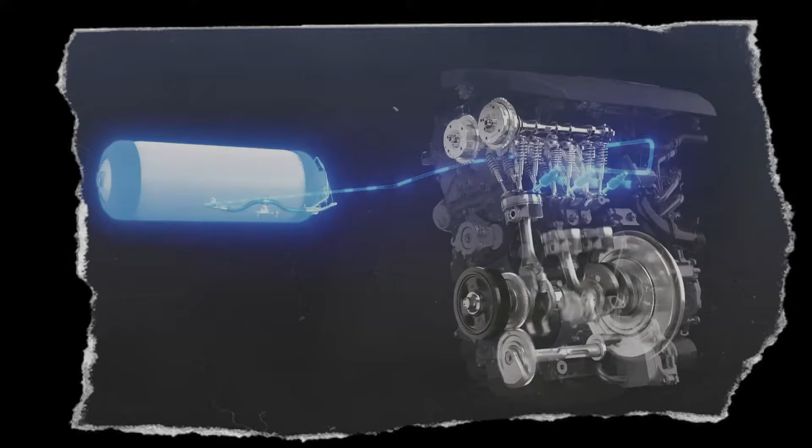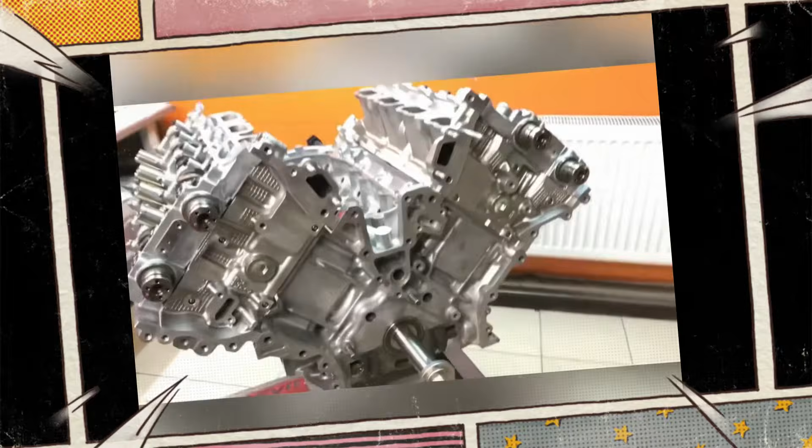Toyota has a reputation for producing robust, reliable engines, and the 1UR-FE is no exception. This 4.6-liter naturally aspirated V8, part of Toyota's UR engine family, succeeded the legendary 2UZ-FE, featuring advanced technologies and construction methods aimed at improved efficiency, performance, and reliability.

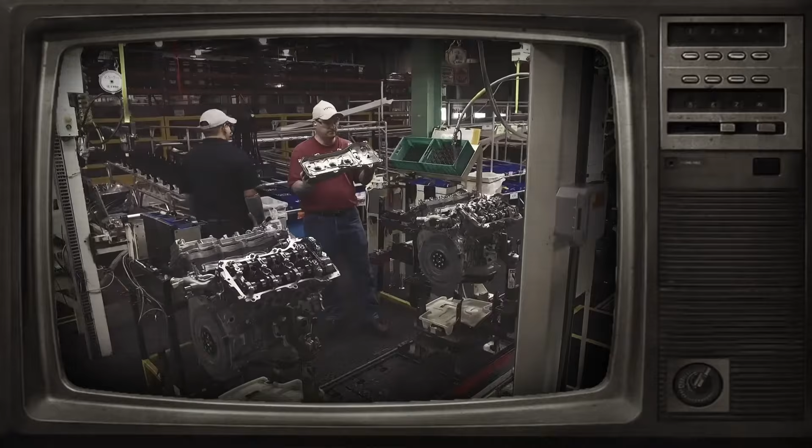Initially introduced in Lexus vehicles, the 1UR-FE later powered various Toyota models such as the Land Cruiser 200, Sequoia, and Tundra. In this video, we'll dive deep into the engine's design, explore its specifications, highlight known problems, and provide insights into its real-world reliability.

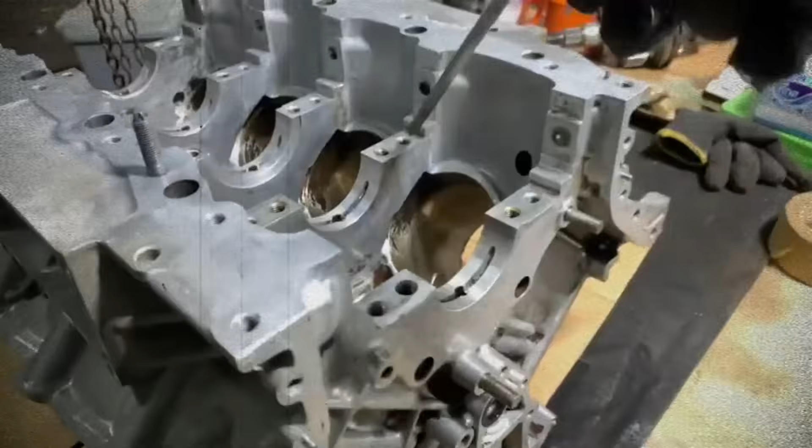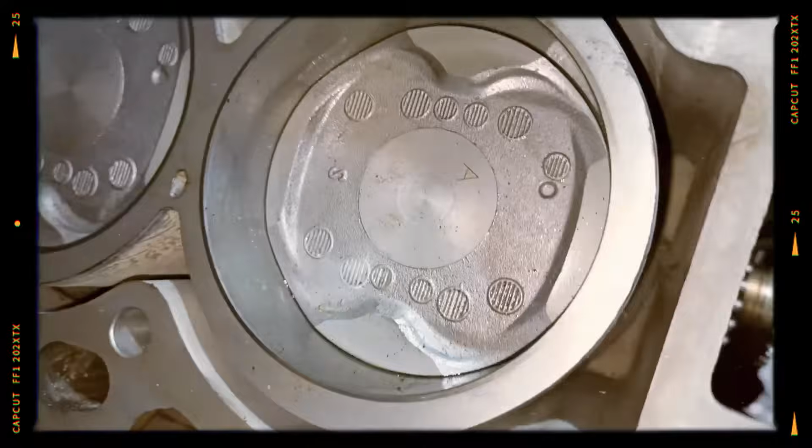The 1UR-FE is built around an aluminum alloy V-shaped block with a 90-degree angle between cylinder banks. Unlike its iron block predecessor, the new aluminum block incorporates durable spiny-type cast iron cylinder liners for better heat dissipation. Its bore measures 94 mm with a shorter stroke of 83 mm, resulting in a displacement of 281.2 cubic inches.

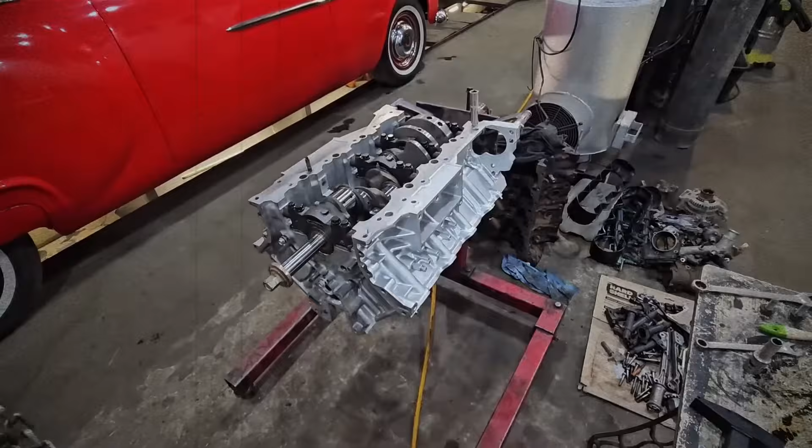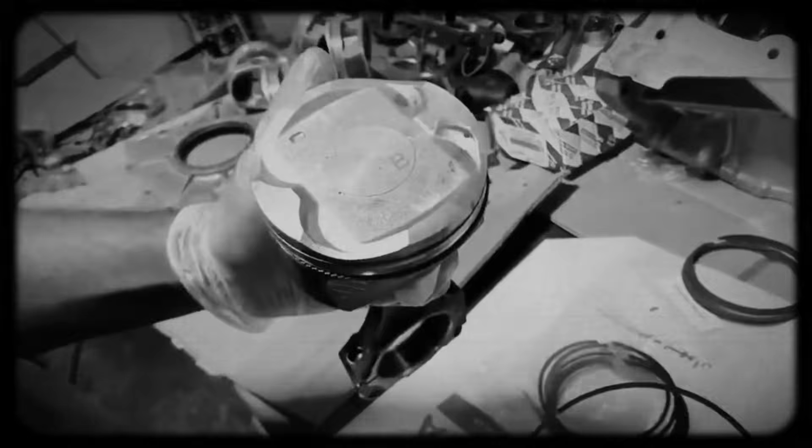The forged steel crankshaft features 6 counterweights, fewer than the 2UZ-FE, which slightly reduces operational smoothness but saves weight. A torsional rubber damper on the crank pulley compensates effectively for vibrations. Forged connecting rods and aluminum pistons with resin coatings, combined with piston cooling oil jets, ensure durability and efficiency.

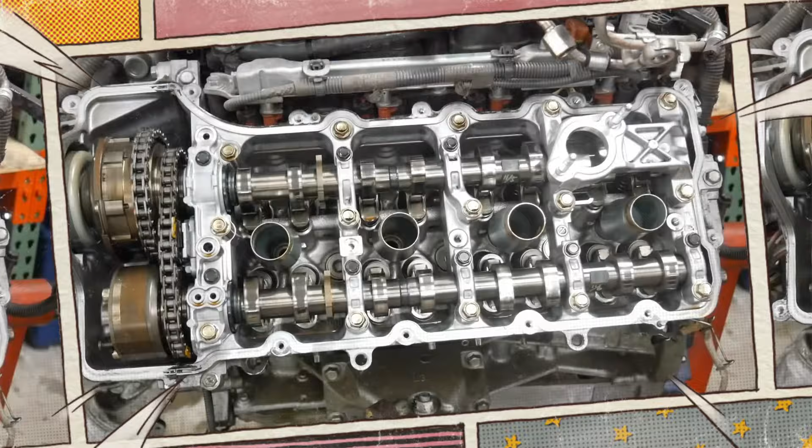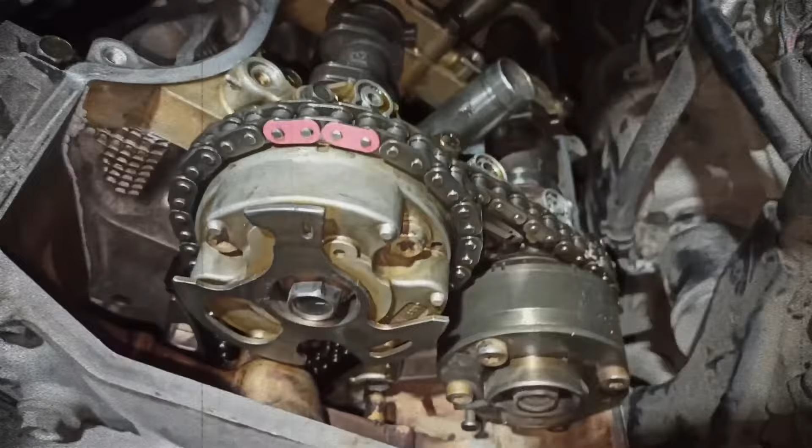A completely revised cylinder head design accompanies the new aluminum engine block. Each bank utilizes dual overhead camshafts, DOHC, operating 4 valves per cylinder, 32 valves total. A significant improvement is the adoption of chain-driven timing instead of belts, enhancing reliability and reducing maintenance costs. Primary timing chains drive the intake camshafts, while secondary chains connect intake and exhaust camshafts.

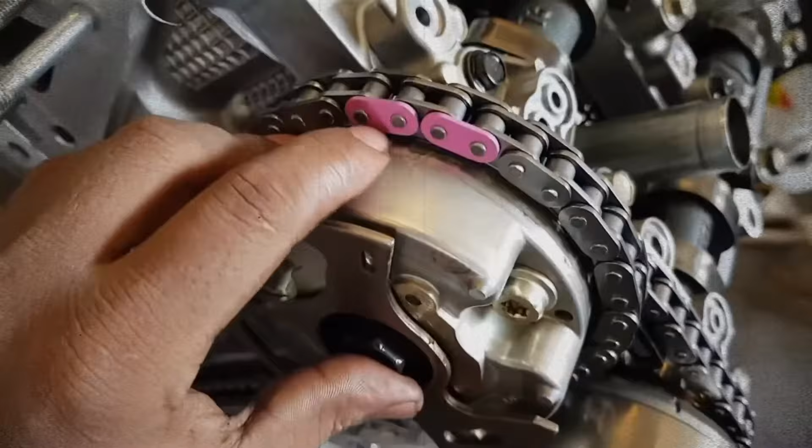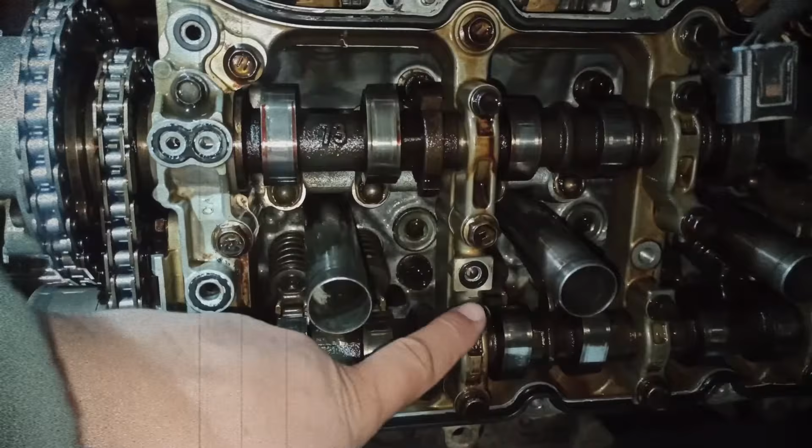Hydraulic lifters are now standard, eliminating the need for manual valve clearance adjustments. Additionally, Toyota incorporated its Dual VVT-i system, controlling both intake and exhaust valve timing, and installed magnesium alloy valve covers to reduce overall engine weight.

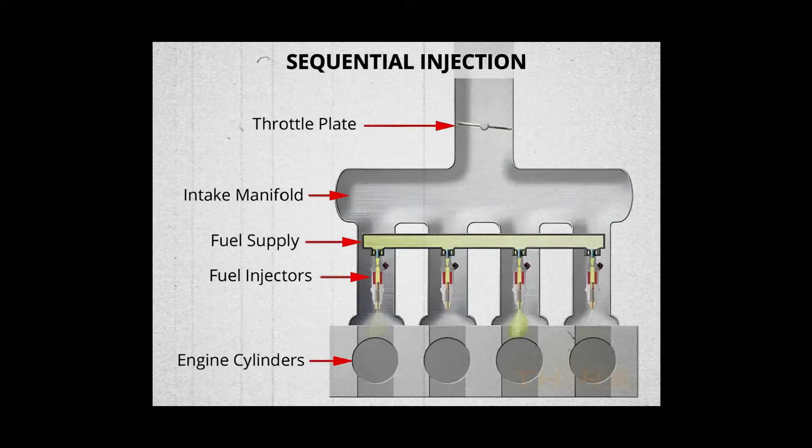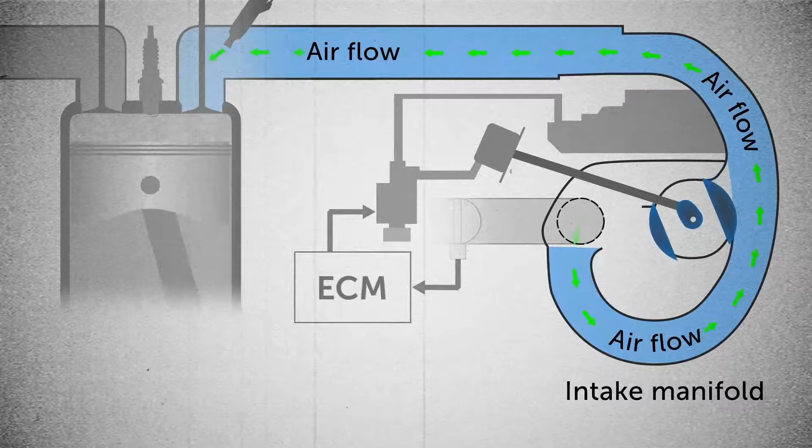Fuel delivery utilizes sequential fuel injection, SFI, characterized by 12-hole injectors for precise fuel atomization and efficient combustion. The intake system includes Toyota's acoustic control induction system, ACIS, optimizing airflow and torque across various RPM ranges. An electronically controlled throttle body, ETCS-i, further enhances throttle response and engine efficiency.

The 1UR-FE's exhaust system features stainless steel headers and piping, with dedicated catalytic converters for each cylinder bank. To achieve strict emissions compliance, Toyota equipped this engine with a water-cooled exhaust gas recirculation, EGR system, and a secondary air injection, SAI system, which rapidly warms catalytic converters during cold starts, significantly reducing harmful emissions.

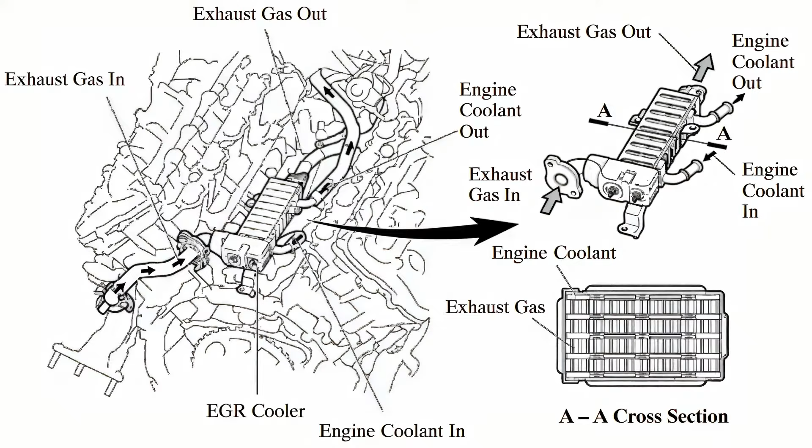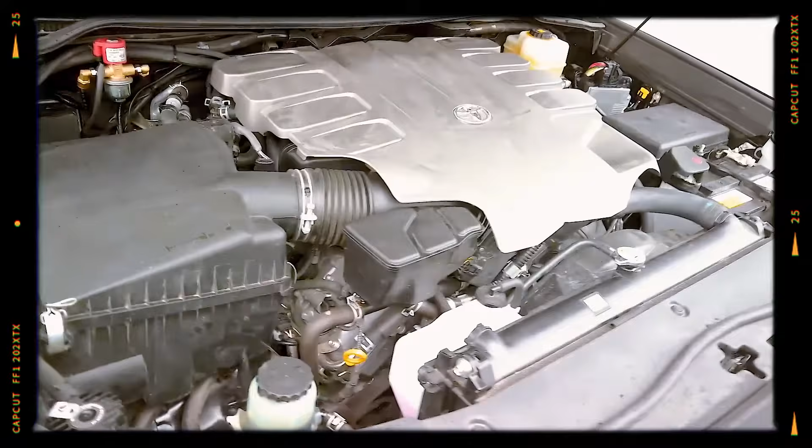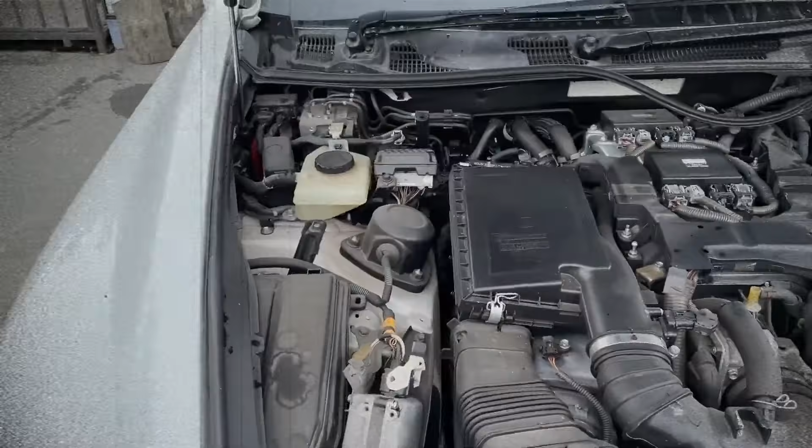The Toyota 1UR-FE produces approximately 304 horsepower at 5,500 RPM and delivers around 439 Newton-meters of torque at 3,400 RPM. Variants of this engine, like the 1UR-FSE, with combined direct and port injection, offer higher performance figures up to 385 horsepower and 500 Newton-meters of torque.

While highly durable overall, the 1UR-FE has a few known problem areas. Water pump failures, often occurring around 60,000 to 100,000 kilometers. Premature leaks from water pumps necessitate regular monitoring and timely replacement. Timing chain and tensioner issues. Although chains typically last around 300,000 kilometers, occasional premature failures of hydraulic chain tensioners may cause rattling noises and potential chain looseness.

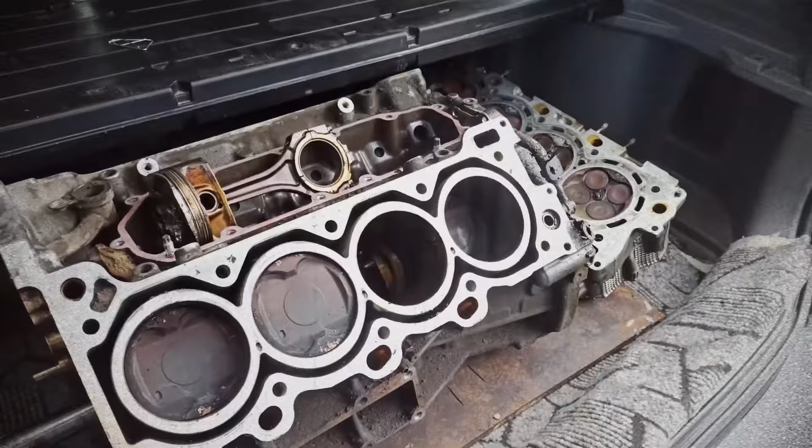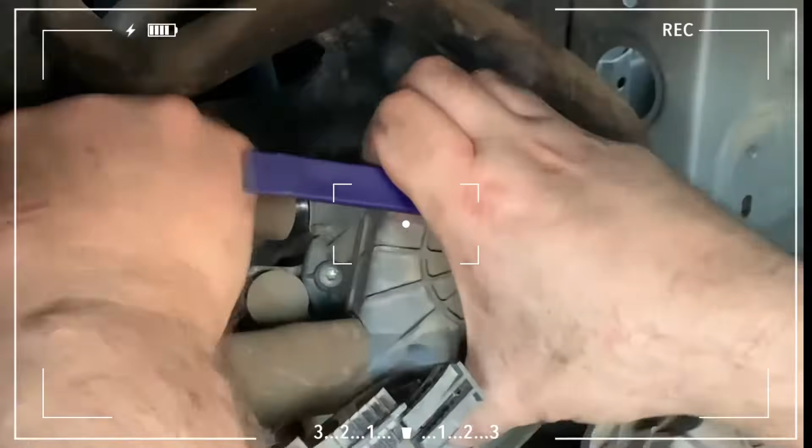Valve spring recalls. Early production models, around 2010, had weak valve springs, prompting Toyota to issue a recall and replace the springs under warranty. Moderate oil consumption. Urban driving conditions may lead to piston ring deposits and subsequent oil consumption, sometimes around 0.5 liters per 1,000 kilometers. Secondary air injection, SAI, failures. Valve sticking within the SAI system can cause check engine lights and emissions-related issues, requiring component replacements or cleaning.

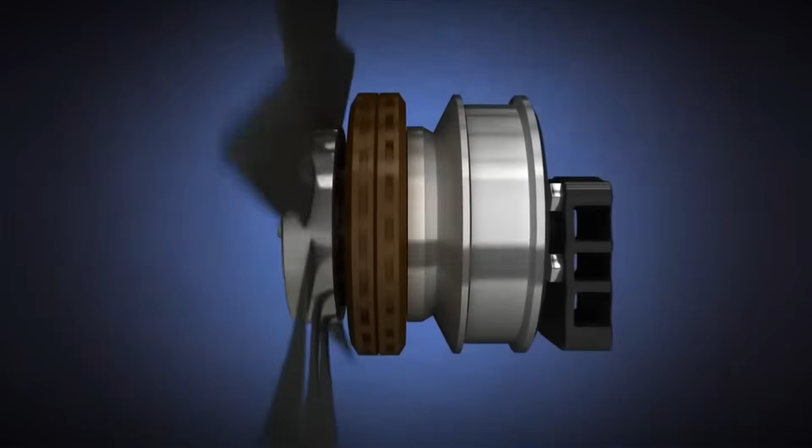Cooling fan clutch and coolant leaks. Frequent issues include failures of the cooling fan clutch and minor coolant leaks around cylinder head and block junctions, typically occurring around 100,000 kilometers.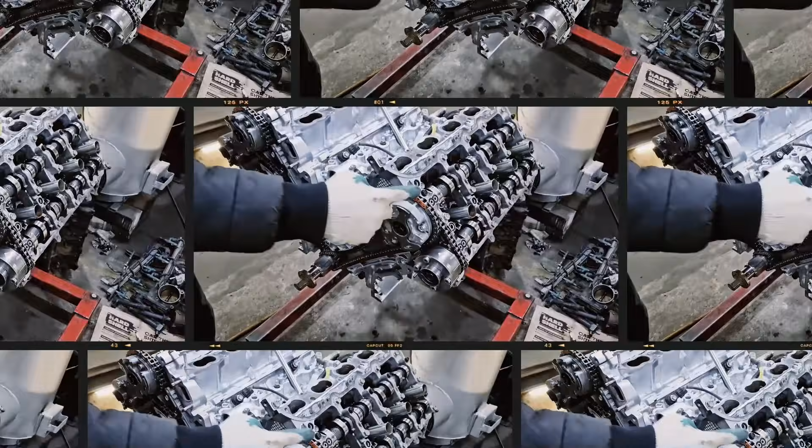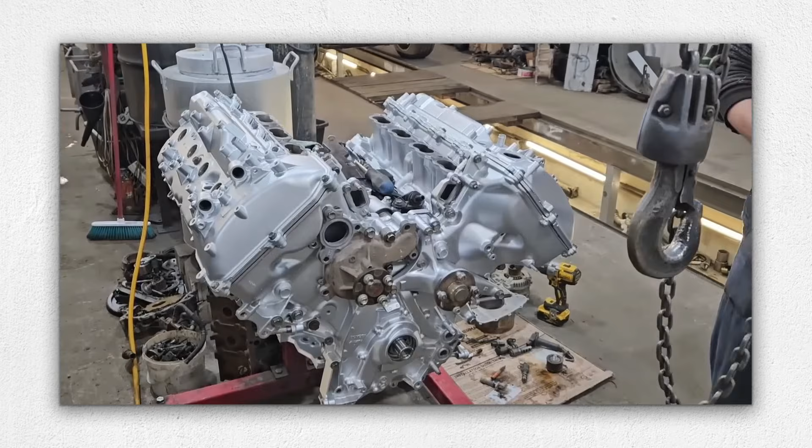Despite these noted issues, the 1UR-FE is considered a robust and reliable engine. With consistent high-quality maintenance, regular oil changes, and prompt attention to minor issues, this engine routinely achieves service life exceeding about 300,000 miles and more. The inherent design, durability, and quality materials contribute significantly to its reputation for reliability.

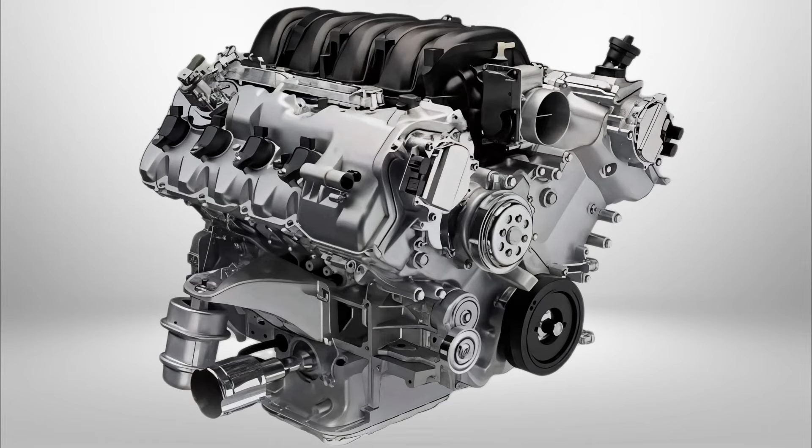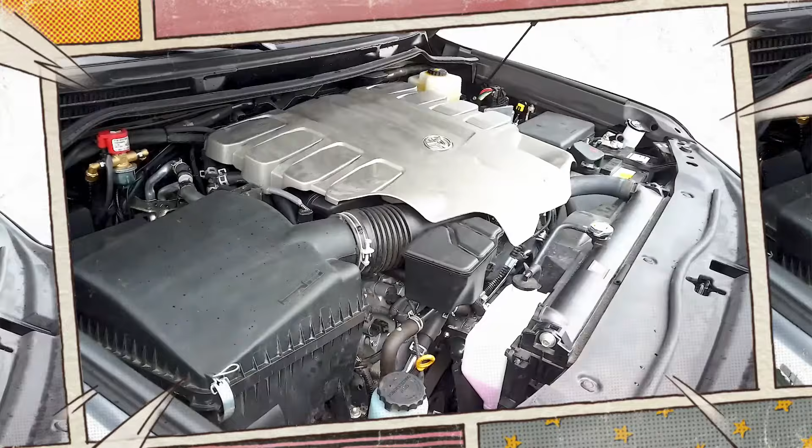The Toyota 1UR-FE 4.6-liter V8 continues the legacy of Toyota's dependable V8 engines, balancing sophisticated engineering with practical reliability. Though not immune to specific weaknesses like water pump leaks, moderate oil consumption, or timing chain tensioner issues, these concerns are manageable through proactive maintenance. For owners and potential buyers of Toyota and Lexus vehicles equipped with the 1UR-FE, awareness of these characteristics ensures years of enjoyable and trouble-free driving.